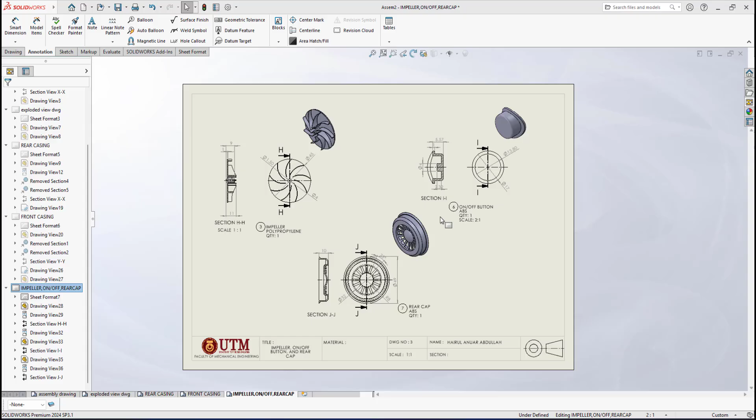This video will be part 16 of my SolidWorks mini vacuum cleaner project. For this video I will show you how I will do the detailed drawing of the other three parts, which is the dust container, valve, and also the crevice nozzle. So what I will do, I will duplicate this sheet here. I will make a copy and I will paste it.

So this I will rename it as, okay, this will be three parts. Like this drawing, I have the impeller, on-off button, and rear cap. For this drawing, I will put dust container, the valve, and also the nozzle into one drawing. Sometimes you can do that in a set of working drawings.

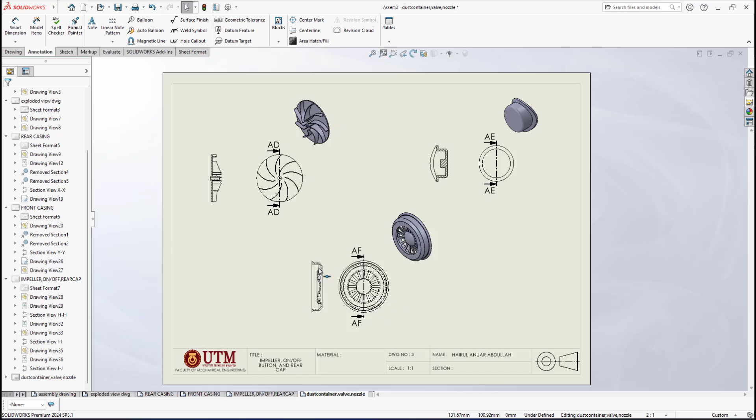Here in the view palette, I don't have anything. If you look at the view palette, I need to browse. Before that, I need to delete all this. In the view palette, I will browse for the dust container. This will be all the views from the dust container.

As you can see, I will not go for the front, the first view, since I will make a full sectioning for this dust container. I think the appropriate view would be this, the back view here. I click it, I bring it here, and I don't need the left view here because I will make a full section, and what I need is this isometric view. I will go for this orientation, and I don't need the other view.

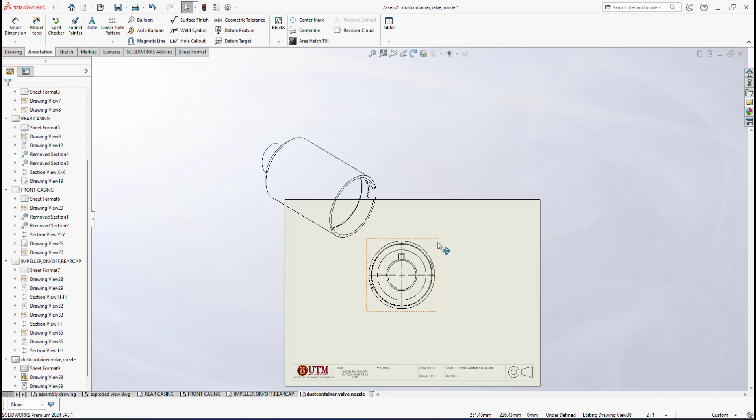The first thing is that this is 2:1, so I will go for full scale. For the isometric, I will go for half scale, and shaded mode. I consider this like a side view, so it means the front view. On the left view will be the full section view.

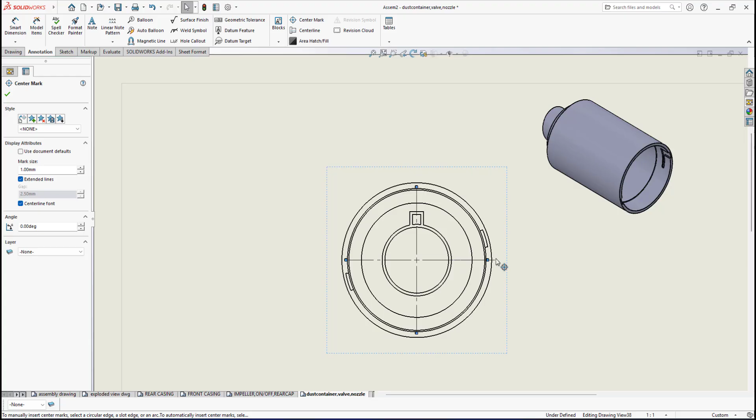This one, make sure tangent edge is removed, and about the center marks, I will go for 1, and I need to make this show hidden lines. I will do a full section vertical at this point. I click OK, then I will go for this direction.

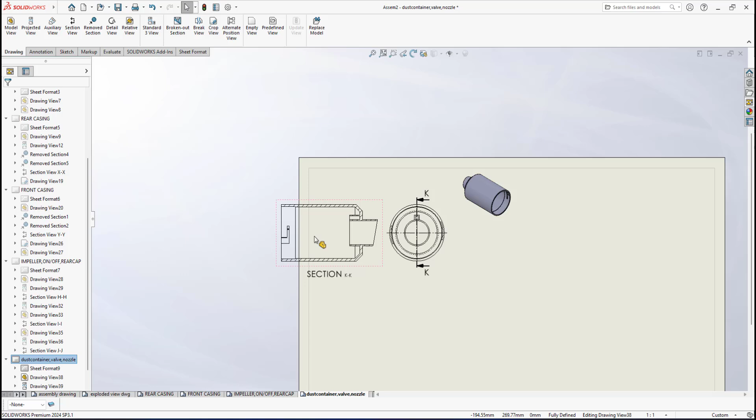About the name, since in the previous drawing I have H, I, J, this one will be K. Section K-K, and make sure that it flips direction like this. And this one I bring it to this position.

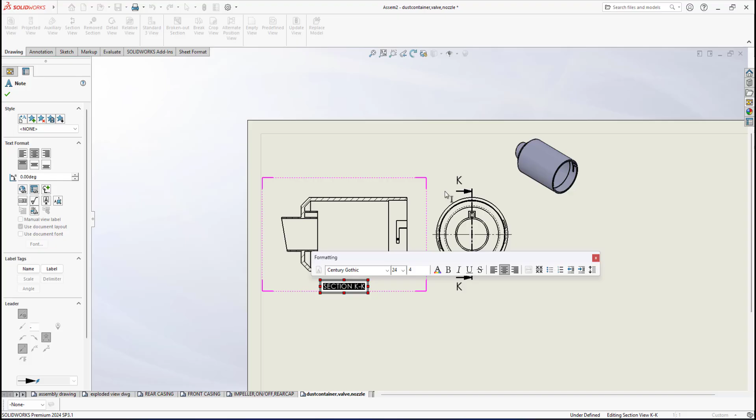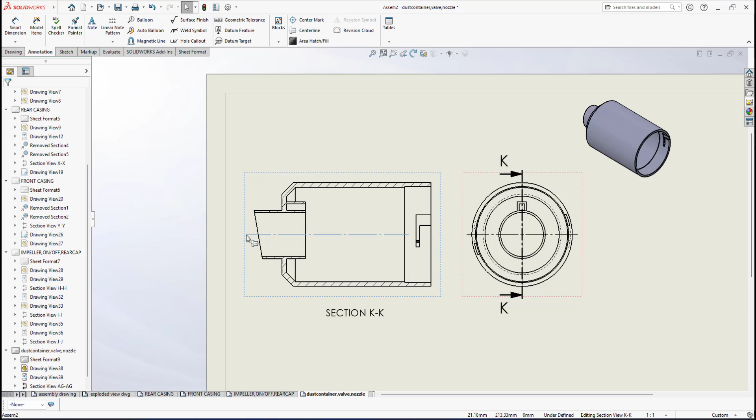This one also has to be tangent removed. Already done, and I need to show the center line. And about the section line.

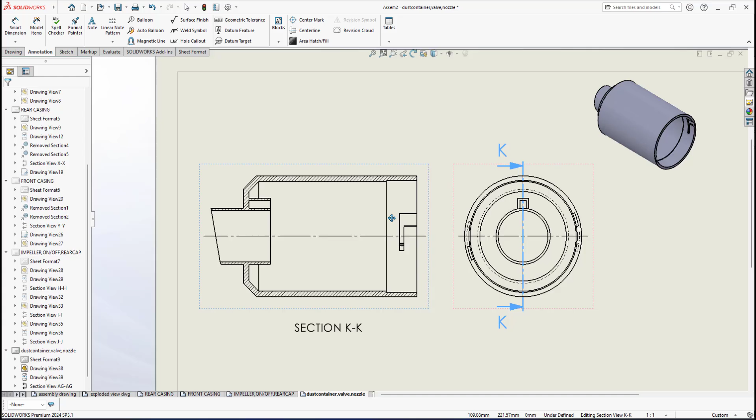For this component, it is a plastic component. As I mentioned before, we don't need to really make a detailed and complete dimension, as long as the dimensions that we show are important, necessary for the assembly and fitting, and only basic dimensions that we think are necessary for this detail drawing.

The first thing is the major diameter of this dust container. So I will dimension here. We have diameter 54. This will be important since it is the main diameter. Another thing is that for the assembly, we have this internal diameter here. The HEPA filter will be mounted until this level. The HEPA filter has this diameter, so this diameter needs to be shown.

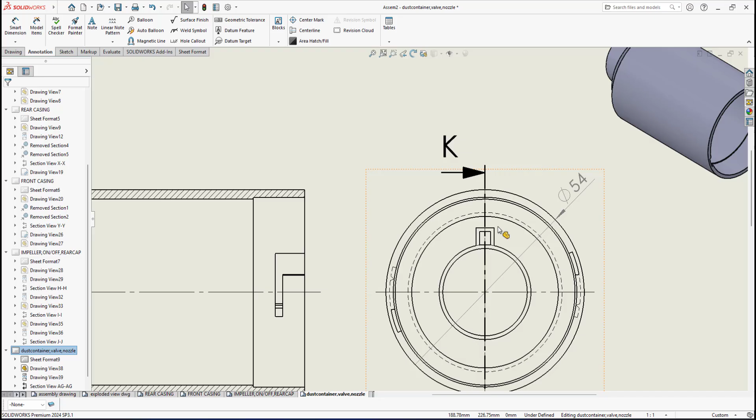For this diameter, if I put it here, it's kind of not showing, because since we have a section view, it's better to put the inside diameter at this section view. So I will put diameter 50. That is an important dimension to show the fitting of the HEPA filter, and we need to show how deep the HEPA filter will be mounted inside this dust container.

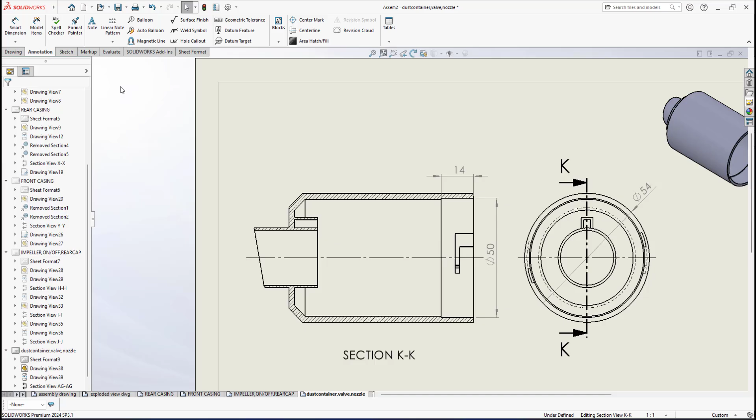So it will stop at this stopper. We have a cutout here, so you need to show the length of the depth. So I will put it here. And also the total length is important. Let me save my file again.

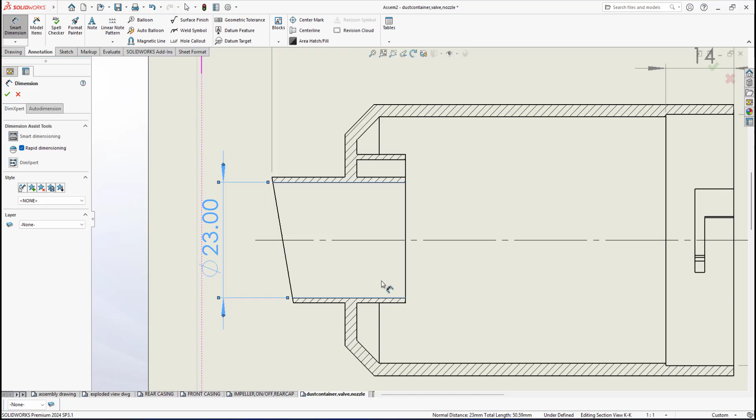Since we need to fit the nozzle of this dust container with what we call the crevice nozzle, the long nozzle will be fitted inside this opening of the dust container. We have the opening valve here, so we need to show the inside diameter. This is important to be shown. So I will give here diameter 23. Oh, decimal point. This one I can right click.

Alright, another thing is, I already gave the total length and the depth of the cutout, and this nozzle diameter. I need to give the dimension from here to this point; it needs to be shown. Right, so I will go for the dimension from this line to this point. Make sure it's in line with this 14. Okay, 27.5.

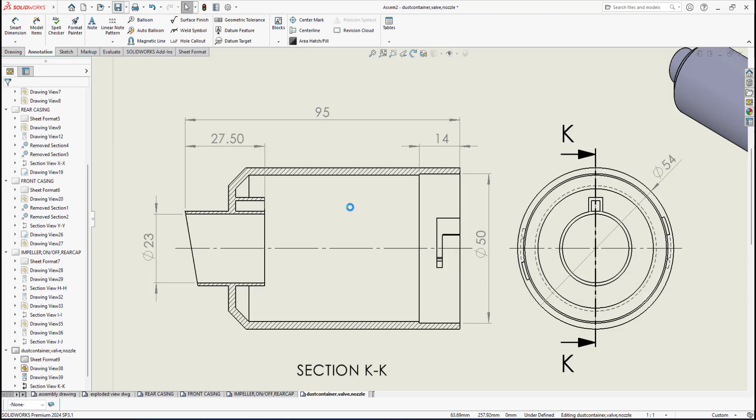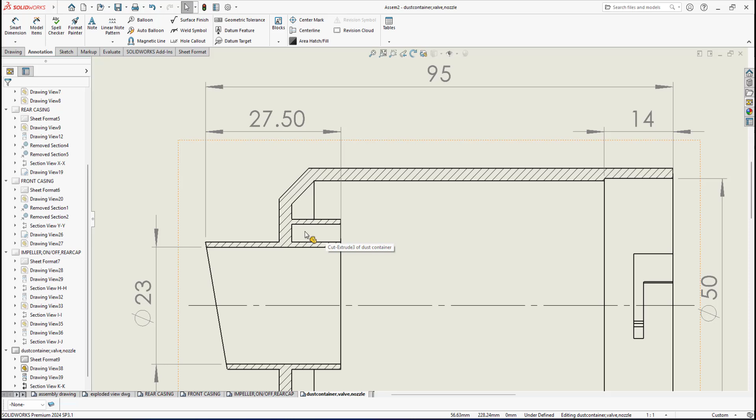Right, the next thing is, we have the valve here. The crevice nozzle valve will be fitted into this. We have a cutout, what we call a key. What I mean is a slot for the key of the crevice nozzle. Sorry, this is a key. What I mean, this cutout is a slot where we will fit the valve. The dust container valve has a rectangular key, so this will be the rectangular cutout. So I need to show this dimension.

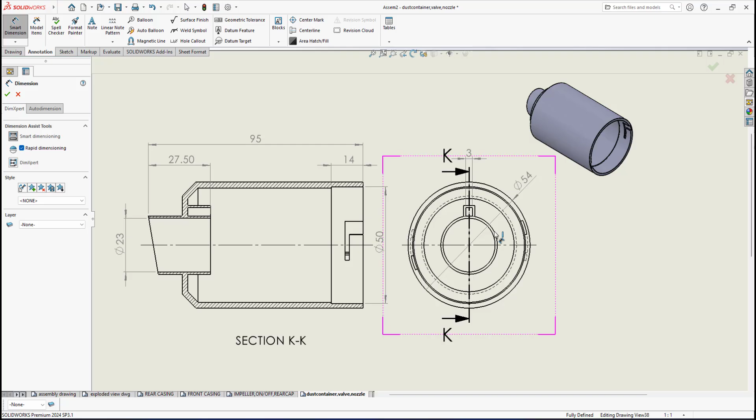Right, better to show the dimension here, because this view clearly shows the profile of this rectangular slot. So I need to give, okay, let me put it here. So this would be dimension 3, and I will give the length of this cutout. I will make it from here to this center point. Make sure it snaps at the center.

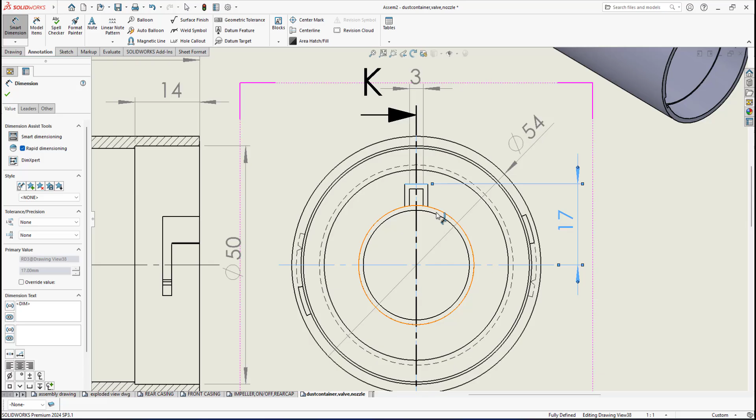I have here this one, so this will be the height, right? So I have given the width of this carrot as 3, and I already gave 17 from the center point, so we will know what the height of this carrot is. And I have to give this diameter as well, and the inner diameter is already given, 23. Alright, I think this is enough.

Alright, another thing, maybe I can give the thickness of the shell of this. Okay, there's another dimension that needs to be shown. Make sure it's in line. And alright, maybe I can give the angle of this cutout of the nozzle.

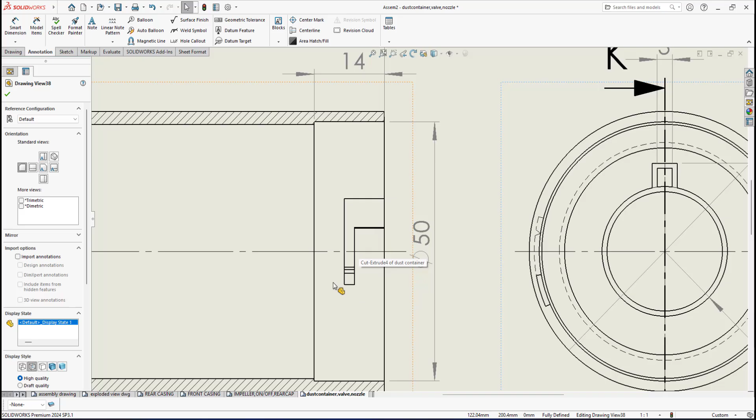Okay, the next important feature that we need to show here is what we call the L key slot. If you look at the rear casing detail drawing, I made a crop view to show that at the back we have the L key. Since this is a front view of the rear casing, the key will be at the back, so here is a back view. Looking at the back, I made a crop view to show the features of the L key, and this L key will be fitted into this dust container.

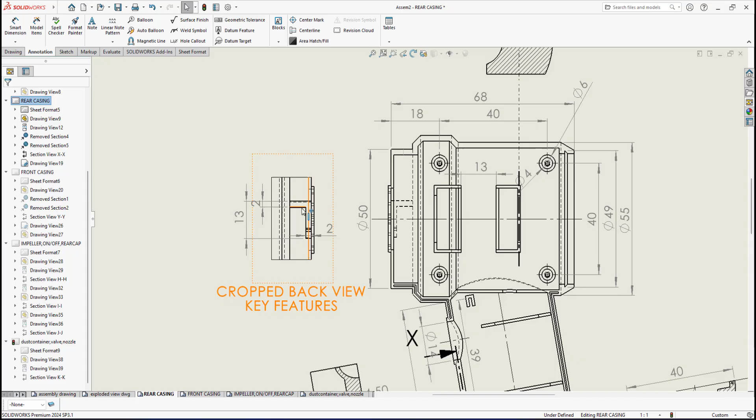This dust container will be fitted at the end of the rear casing, so it will be the L slot. Since the rear casing has the L key, the orientation of the L is inverted because we are looking at the back. Actually the L shape is in this orientation. Similar to this one, I need to show the dimension of this L slot. I will do a dimension from here to here, and it's stated that it is 16.

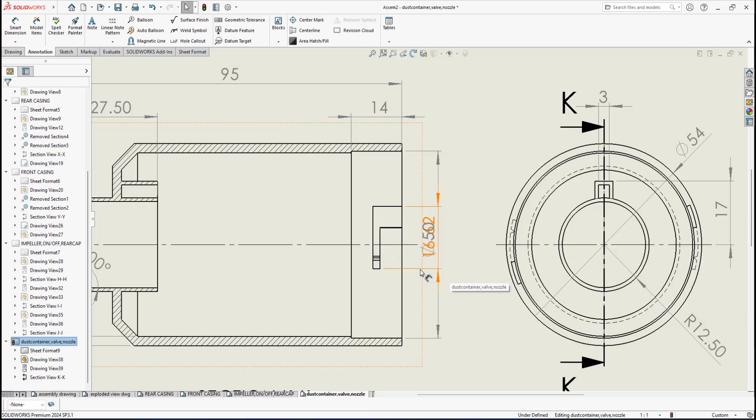Actually it is much longer compared with the L key of the rear casing, because when we fit the end of the nozzle of the rear casing and front casing, we turn it to make a snap fit, so this one has to be longer. The length of the L key is 13, but the L slot is longer. This one I need to drag; diameter 50 has to be shifted to this position, so I have 16.62.

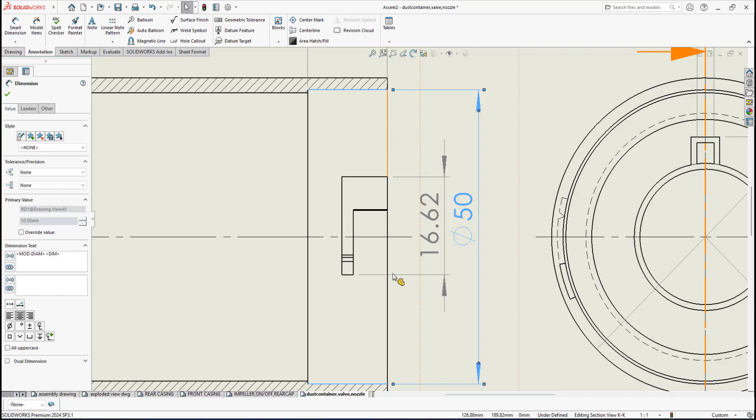Actually the true length is not 16.62, because I made this L slot by using the wrap command along the circumference of the cylindrical shape, so the actual dimension is 16. So I will select this dimension, and in the dimension text I replace it by 16, so that will be the true length. And also I will give the thickness here, and sometimes I can put it inside for clarity, so the thickness will be 8.

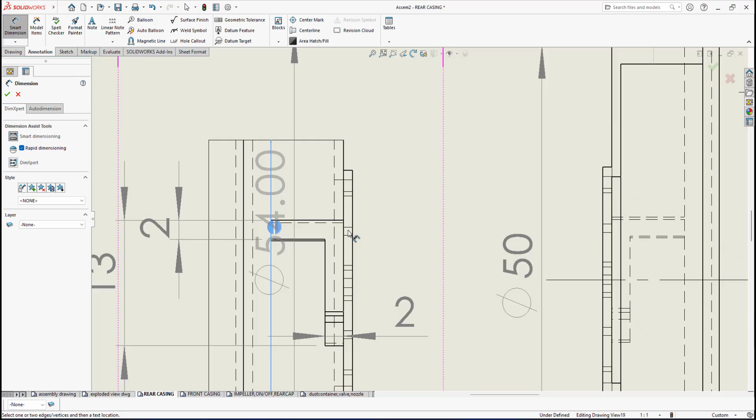Okay, if you look at the rear casing, the key of the rear casing, it's not showing here. Actually I need to add the dimension here. I didn't put any dimension, so it means I forgot the dimension for this in the rear casing detail drawing. I need to put it here to show the thickness of the L slot. Okay, I save my file again.

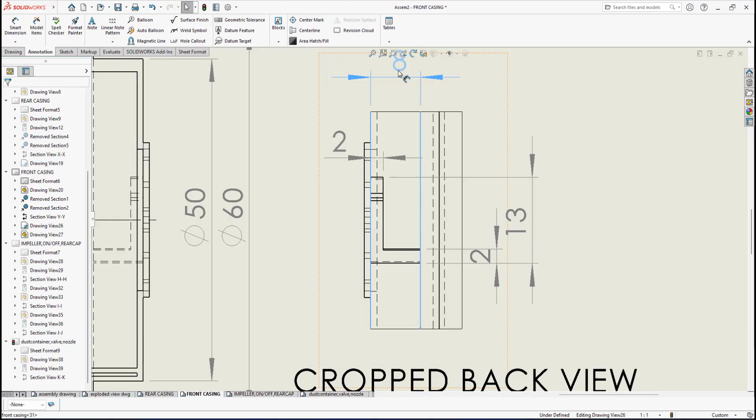Same goes for the front casing. I forgot to add the distance here. I need to show from here to here is 8. Actually, you put your dimension not too close to the border of this view. It must be at least 2 letter heights, but not too far above, about 2 letter heights.

Okay, back to the dust container detail drawing. So I've already put it here, and I've already given 16. Another thing is about the distance. Actually, this is not the true value. Just need to mention again from here to here. Since I have 16 here, and I put it into this location, it's 5.72, but the true value is not actually 5.72. And this 50 needs to be shifted here.

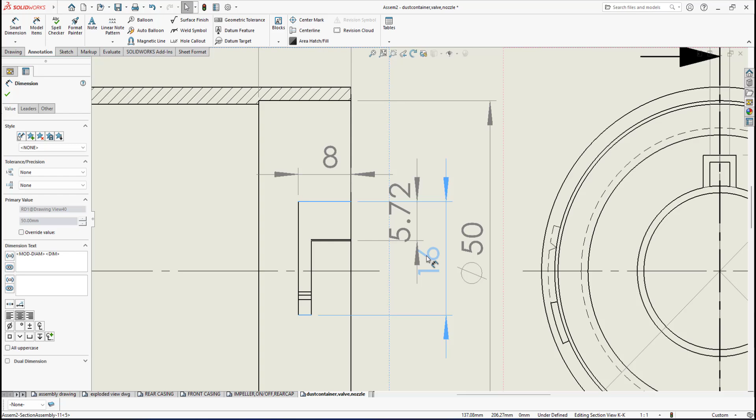Okay, the rule of dimensioning is that the extension line will not cut the dimension line. So this is a dimension line. In this case, I have the extension line, and this is 5.72. If I'm not mistaken, the 5.72 is not cutting the dimension line of 16. This is okay. As you can see, this value is 5.72. Actually, this is not the true value. I need to check it. This one is stated 16. Actually, it's not the true value. Let me check it. I will select this one.

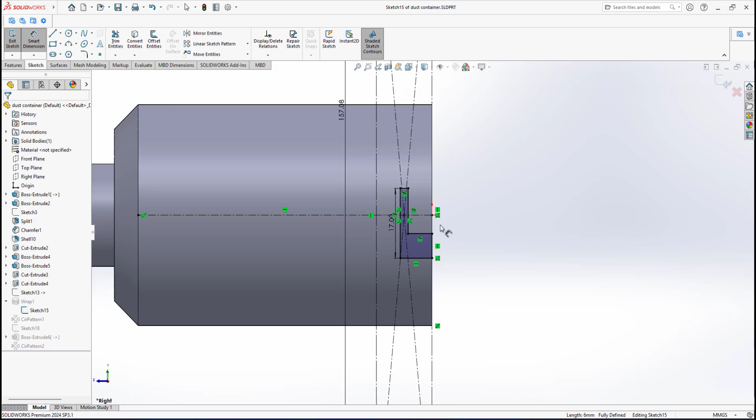I open the part in isolation. So this is the part modeling. Since I made this slot feature of this dust container by using the wrap command, as you can see in the feature manager here, under wrap we have sketch 15. The dimension here is 17, and for this distance, I can check by using smart dimension. So it will be 6 and 17, and the thickness here is 2. 6, 17 and 2. So I exit the sketch, and let me go back to the drawing.

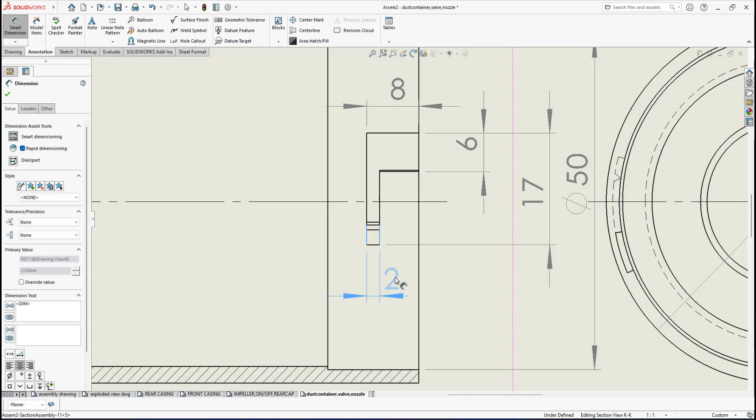6, 17 and 2. So it means that this is 17, not 16. I will change this one to 17, and the distance here I will put as 6. And another dimension is the thickness of this one. I can put it here. Okay, let me save my file again.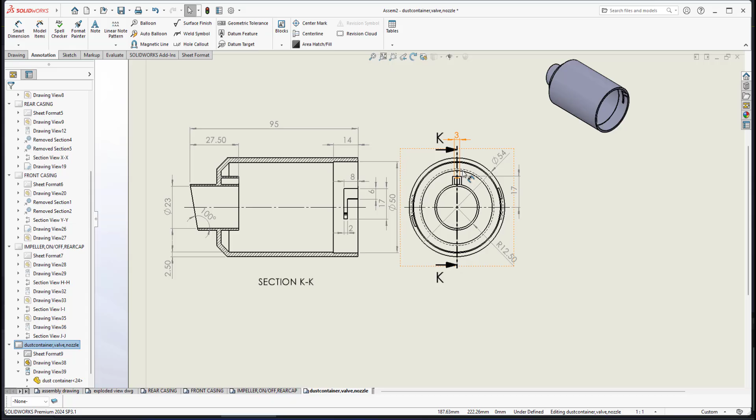Right, basically I have shown the important dimensions for this detail drawing of the dust container. Let me check again. I think this is good enough. The chamfer distance is not significant to be shown, because like I mentioned, the dimensioning is to show the features for assembly and fitting, because the way they manufacture this dust container is not by sending it to machinists to do metal works, drilling, lasering or milling.

This is a plastic part. The way they do it, it is sent to CAM, and CAM is sent to the CNC machine. The CNC machine will make a metal mold for this dust container, and that metal mold will be put into injection molding, and the injection molding makes a mass production of this dust container. So that's how they do it. So we don't have to show really detailed dimensions. The dimensions we show are only for assembly and fitting, only necessary and important dimensions. Alright, I think this is good enough.

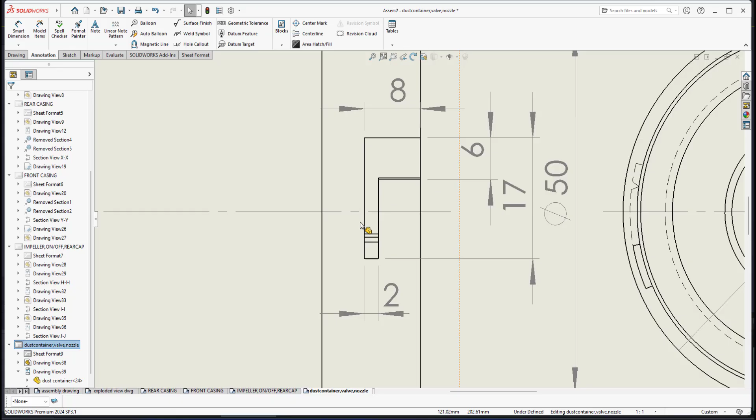What will be the size of the key is not that significant to be shown, because that is too detailed. As long as we show the size of the L slot, it is good enough. Alright, I save my file. So this will be the detail drawing of the dust container.

Okay, the only thing that I need to put is this one, the footnote. Okay, the footnotes, I will copy this one, and I will paste it here. Since I put 3 components, another 2 components will be put into this drawing. So we have to do it like this.

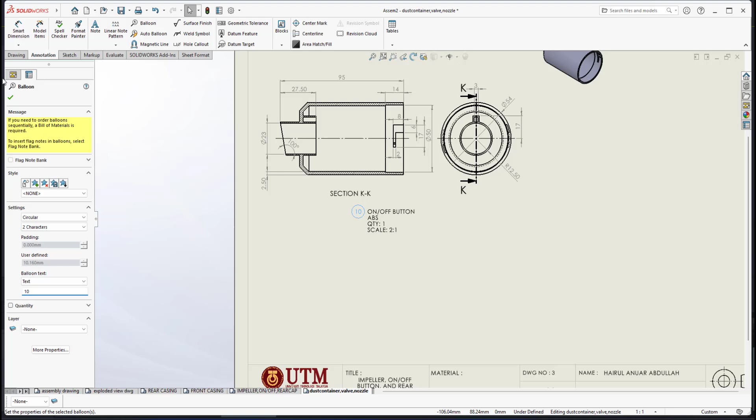Okay, the dust container will be part number 10, right? Dust container will be part number 10. Then I select this balloon, so I change this one to 10, and the name is dust container. The material of the dust container is polycarbonate, right? Polycarbonate.

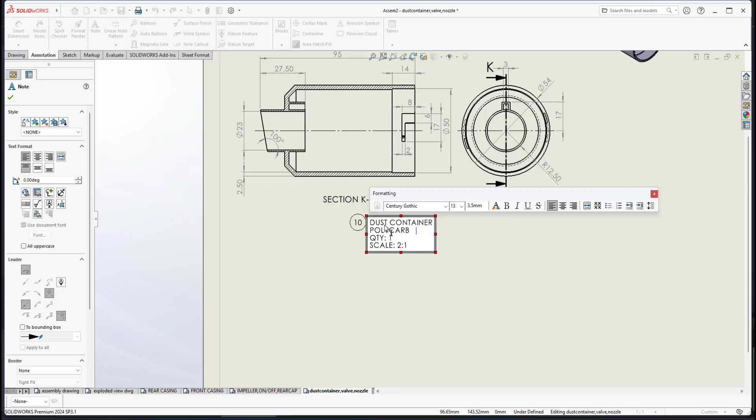Make sure it's uppercase. If I'm not mistaken, we don't have the option to make this uppercase, so I need to type it in capital letters, polycarbonate, and quantity is 1. Okay, the scale is not 2:1 since the scale I use is 1:1. It's already stated here, and also you can check here. The scale that I use for this is actually 1:1. If I go for 1:1, this will be full scale.

Alright, so since this is full scale, this one needs to be deleted. So I have part number, part name, material, and quantity. It means the scale 1:1 will refer to the scale of this main drawing. Okay, now I have completed the dust container.

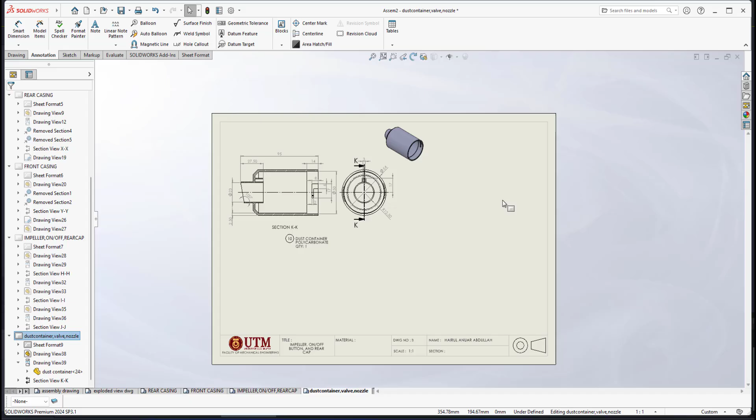Now I will insert the other part, which is the dust container valve. In the view palette, I will browse for the dust container valve, then click open. Then in the view palette, for the container valve, I will go for the back view. Do not confuse about the orientation. This is the way we do part modeling. So the back view, I can call this a side view.

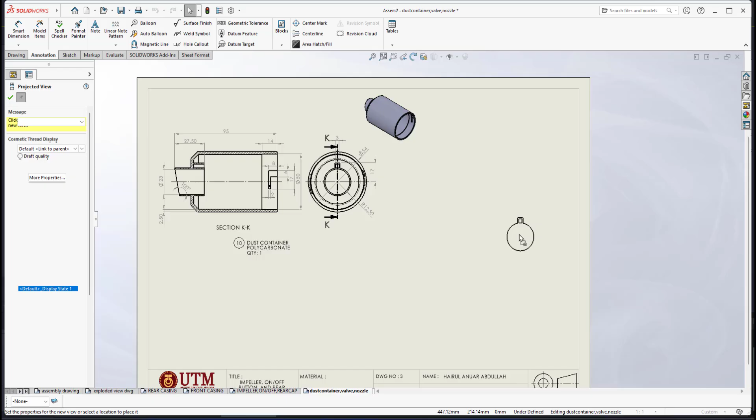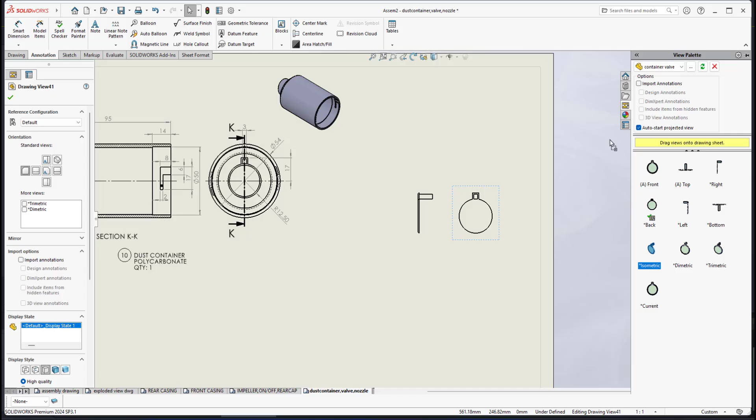Since this is a simple component, no need to be shown in full sectioning. Only 2 views is good enough to represent this dust container valve. Also, maybe I can show the isometric view. This is 1:1 scale. Do I need to make it bigger? Yes, I can. Here I select the main view and I go for 2:1. This one also I go for 2:1.

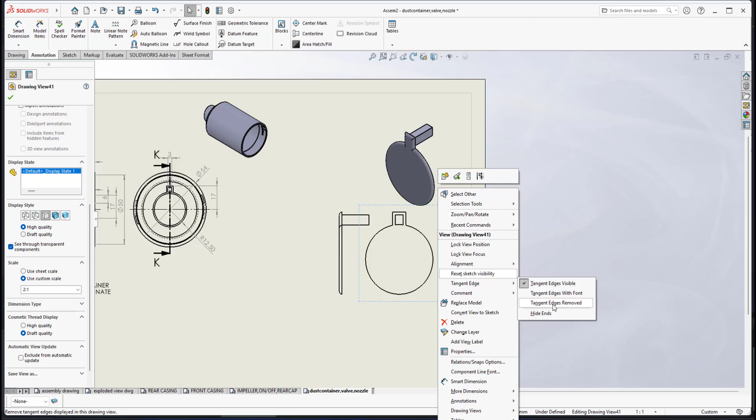Okay, since this is orthographic, better I do sectioning, because we have kind of a rectangular slot. And this one shows hidden lines, since the hidden line showing here is because we have filleting. Okay, never mind, let it be like this. And this is looking at this direction, so we have a key, and I need to put a center mark here.

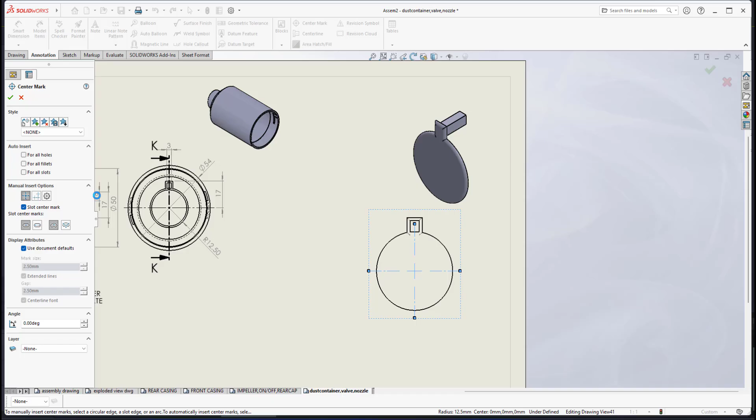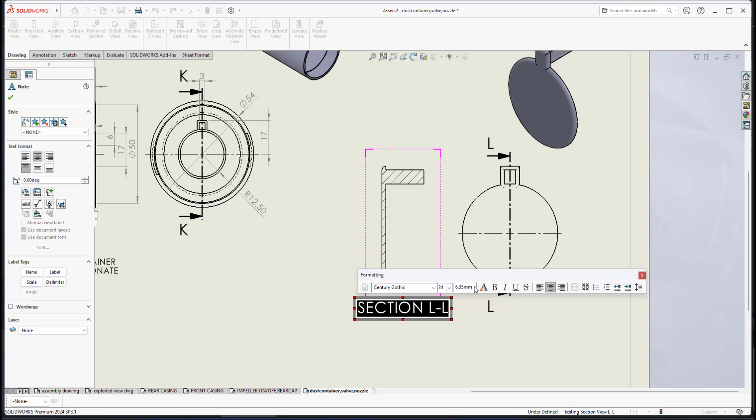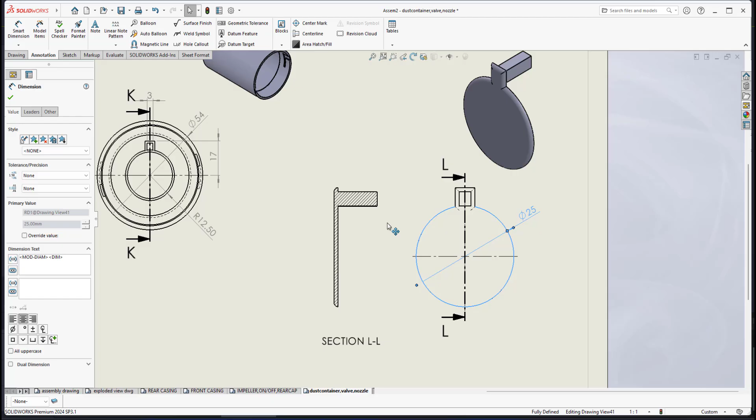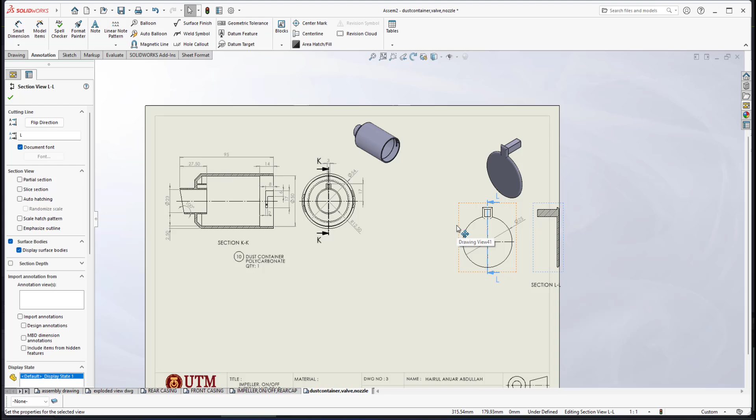As you can see at this view, the dust container valve will be fitted in this orientation. Better I go for this. I select this one, I'm not doing dimension, press escape, I select this cutting line and go for flip direction. So the section view is like this, because it better helps people understand that this valve will be fitted into this rectangular slot. Okay, and put it here.

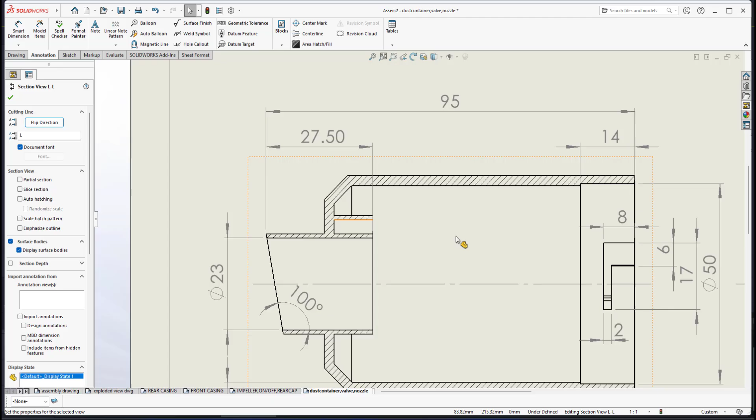I already gave the diameter 25, and since we have a depth here of the rectangular slot, I forgot to add an important dimension: the depth of this rectangular slot. So I put it here. Make sure it's in line. I shift it. Okay, never mind. This one no decimal point. This one needs to be in line with the 14 dimension.

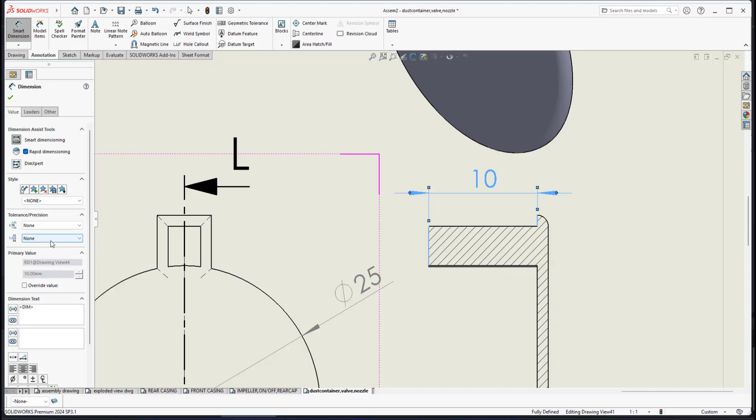Okay, this is 10, and the dimension for this one from here to this line is 10 as well. So this dimension is for assembly and fitting. So this important dimension needs to be shown, and the diameter is already given. What will be the total? Okay, another important dimension is the thickness of this key, 3.5.

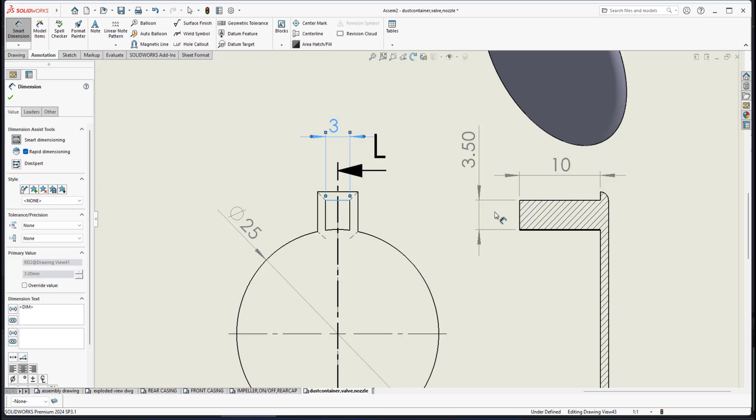And okay, I already gave the thickness, and about this thickness we also need to be careful about the dimension, and also this 3 like this. At this position we have the thickness is 3, and the height here is 3.5. Okay, 3.5.

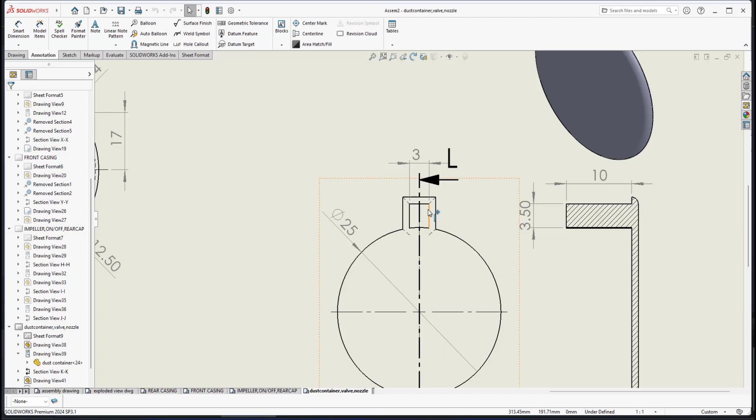Okay, hold on. Okay, now SolidWorks is updating, saving and updating all the settings that I've done. And okay, another important dimension, since this is a dimension of the key, and this offsets the size of the key, but the main thing about the key is the important 3 and 3.5, so it will be fitted to this, what we call the rectangular slot. So I need to give from here to here is 3.5. So this one needs to be shown.

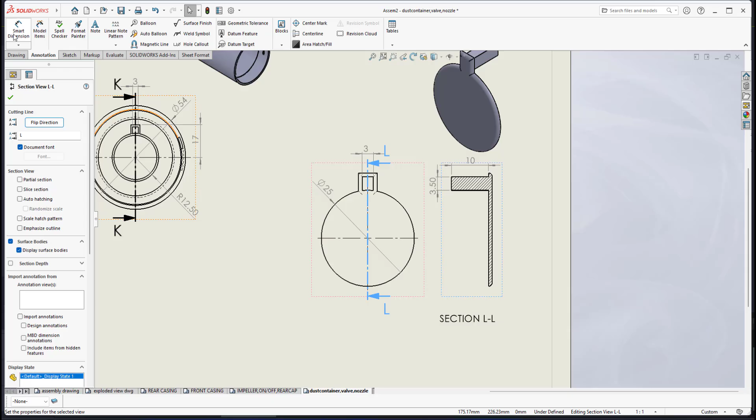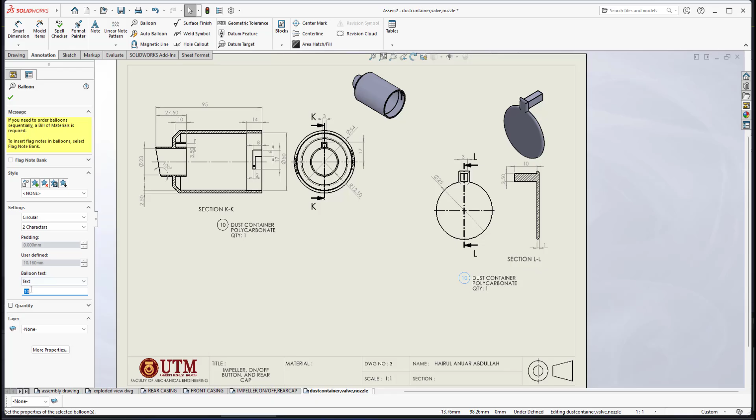Okay, and maybe I can go for the thickness, right? Okay, I think that's all for the dust container valve. And okay, I need to copy this thing. The dust container valve, the part number is dust container valve part number 11. And dust container valve, and the material is silicone rubber, right? Silicone rubber. Hold on.

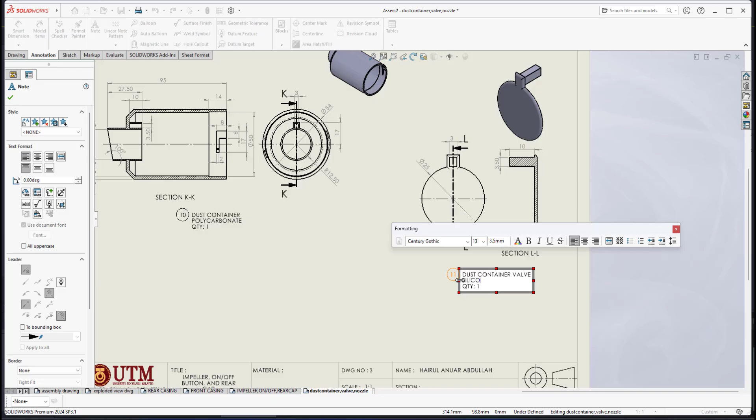This one is maybe something that I missed. Maybe we can change it here to make it uppercase. It means that I need to type it again. Silicone rubber. Silicone rubber. Quantity is 1. And now I have completed the detail drawing of the dust container valve.

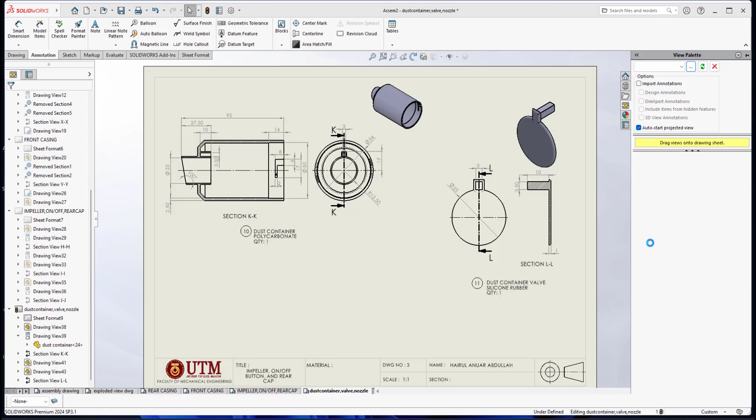And now I will show you how I will do the detail drawing of the last part, which is the crevice nozzle. And here under the view palette, I will browse for crevice nozzle. Okay, if you look at the menu here, we have all the views. What will be the appropriate view to be dragged into this drawing? I will go for top view. I select the top view because it is much better. Later I will do a full sectioning on the front view. Since the crevice nozzle is a long nozzle, better to go for top view.

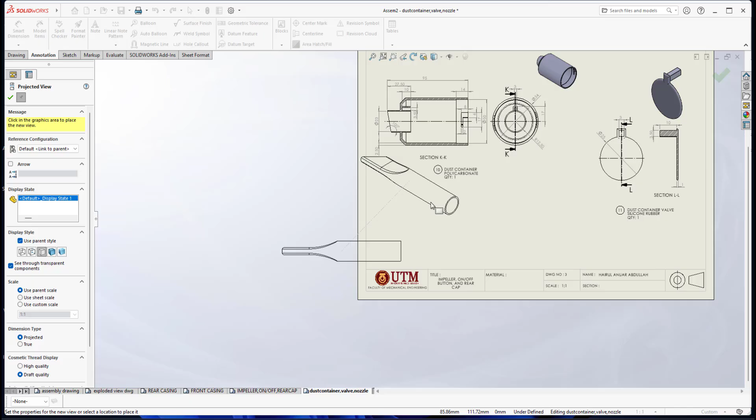Sometimes when you bring it here, it is kind of attracted or attached to this view. I need to make it free. You just simply bring it somewhere here, so it's not attached to any viewport that you have already dragged into this drawing. Alright, I will not go for any side view or top view, and also the isometric view orientation is not the right one. I just press escape. Okay, this top view of the crevice nozzle, let me put it somewhere at this position. Another thing is this is 1:1 scale, so this is a full scale. Full scale is good enough.

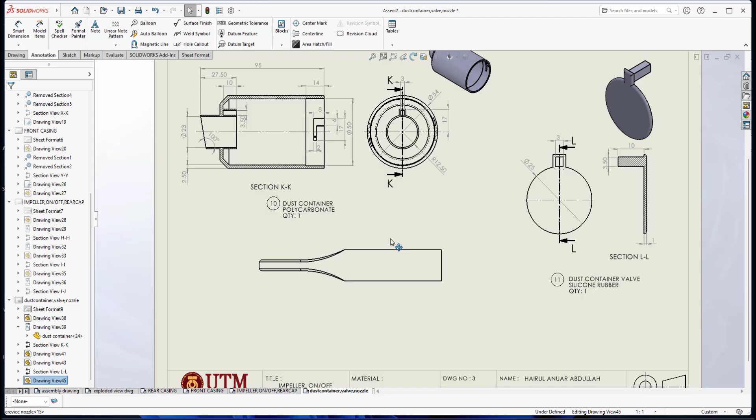Okay, before that, let me adjust the position of this so that I have enough space to do the detail drawing of this crevice nozzle. I need some space here. Right, this will be the top view, and I will remove, and this one must show the hidden line. And another thing about the isometric view, later I will drag this isometric view. Let me put it somewhere here, and this isometric view I make it half scale. Make sure tangent edge is removed, and this one I can make it shaded mode.

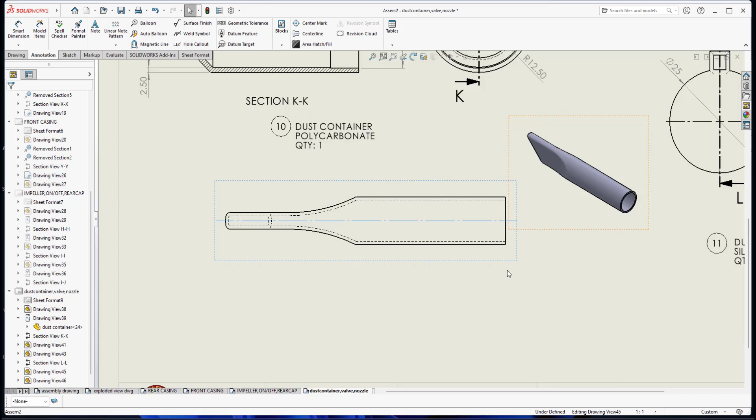Alright, since this is a top view, we must show the hidden line, and we need to show the center line. Since this is within the axis, the line must be shown. And I will do a full section, horizontal, and there, and I click OK. Then I put this as the section view. And since I've already used section LL, hold on, I select this cutting line here, so this one will be M.

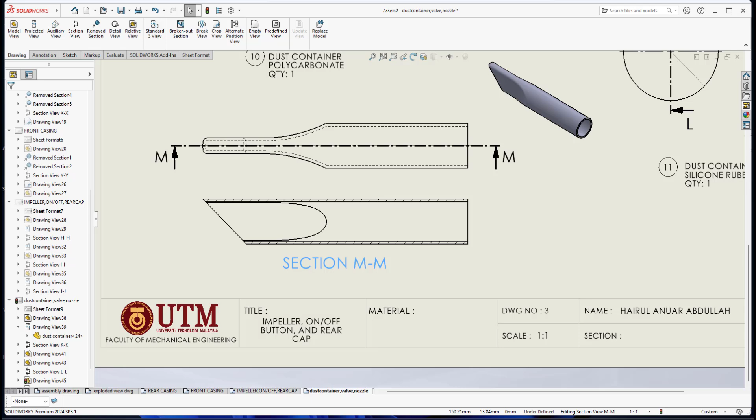And the height is 4. Alright, okay, now I put the dimension.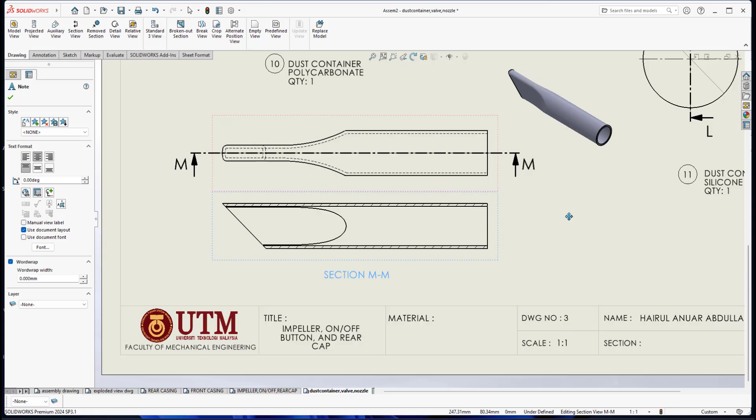Dimension notation, then I will do dimension, since dimensioning is about the important dimension only for fitting. For fitting, it means that this crevice nozzle will be fitted into this opening nozzle here of this dust container, and the diameter is 23. So that's the dimension here. From here to here is 23. And right, another thing is about this hatching line.

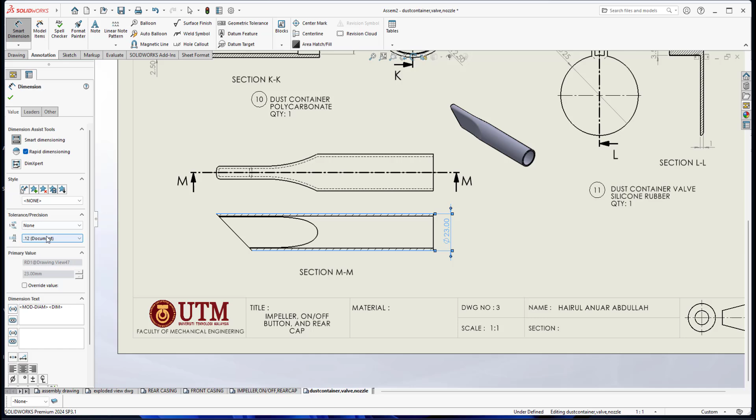And also need to put center line as well. Alright, I already gave the 23. Maybe I can go the inner diameter. The total length.

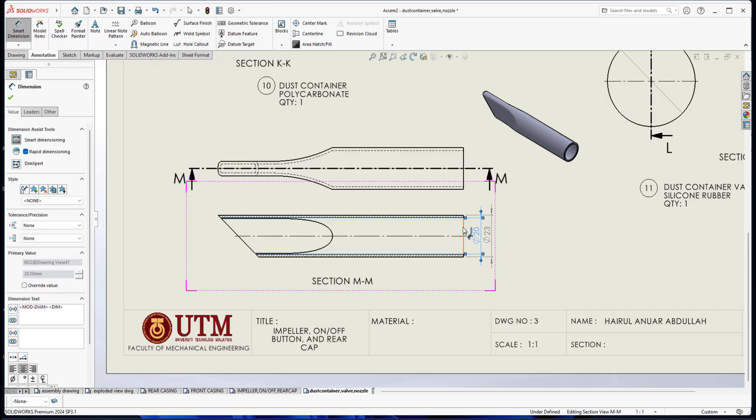If I go for the top view to put the total length, I cannot pin to here, so better to go for this view up until this point. So this would be the length.

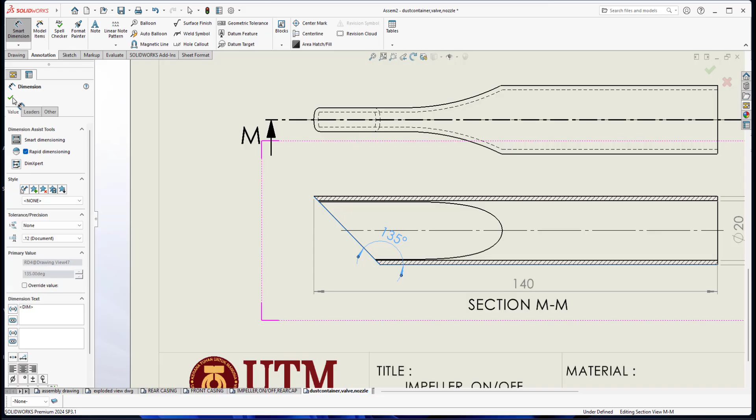Alright, about what will be this curve, the cutout, that is not significant. And what I need is the angle. Right, and okay, I've already given the total length, the tube size, and okay, maybe I can go what will be this length.

Another thing is what will be the thickness at the end of this nozzle here. So I can go for, I can put it like this, right?

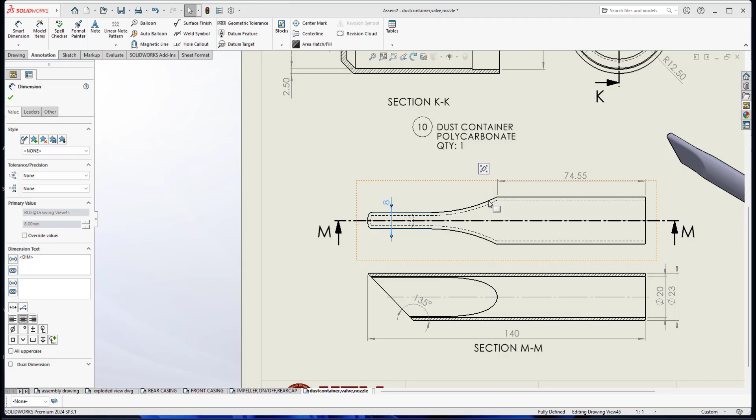Okay, I save my file again. Okay, let me make a final check. Yeah, I think that's all for the detailed drawing of this crevice nozzle. And as I mentioned again, only dimension, important dimension for assembly and fitting, and only necessary dimension like the overall size. Alright, I need to copy this.

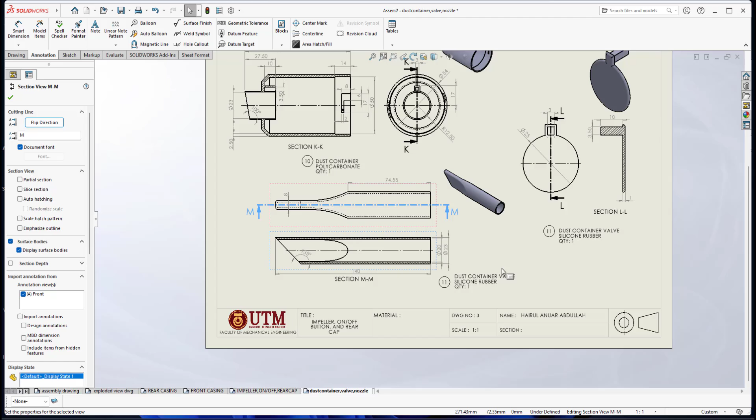And okay, I can put it here. Okay, the name is Crevice Nozzle. Okay, the name is Crevice Nozzle, and part number is part number 13, and material is polypropylene.

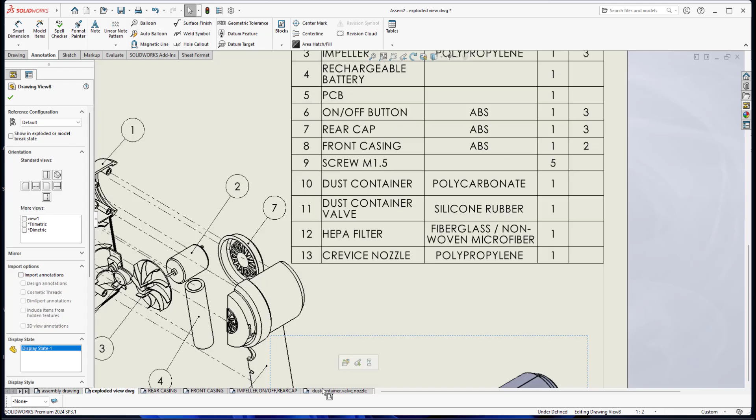Material is polypropylene, polypropylene. Let me check. Polypropylene. Right, and the part number is part number 13, right?

And the quantity is 1. And also this Crevice nozzle, I use 1/1 scale. Okay, I use 1/1 scale, and I will not show the scale at the bottom here. So since it will refer to the scale 1/1 at this title block, alright.

Alright, another thing is about the title here. So I will edit it. So the title will be dust container valve. Dust container. And the Crevice nozzle.

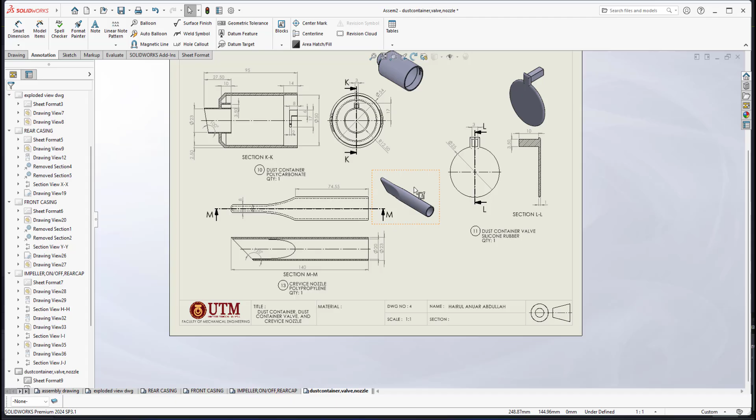Okay, I will not put materials since we have multiple components in the same drawing, and the drawing number would be drawing number 4, and the scale that I use is 1/1 scale. Right, so here in the BOM, the dust container will be drawing number 4. Same goes for dust container valve and the Crevice nozzle.

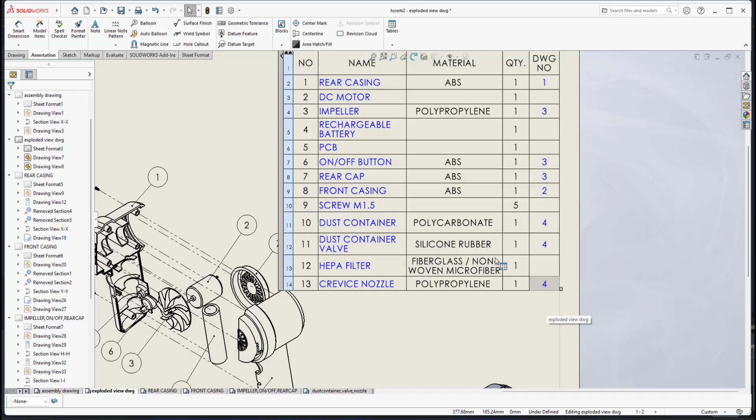Okay, let me save my file again.

Alright, I need to mention to you again about the HEPA filter, since I have already mentioned in my previous video that this HEPA filter will be a standard component. It means that this company who designed and manufactured this mini vacuum cleaner will not make this HEPA filter themselves, they simply order it from the vendor. Alright, so this will be a standard component. So if the HEPA filter is a standard component, we will not do the detailed drawing.

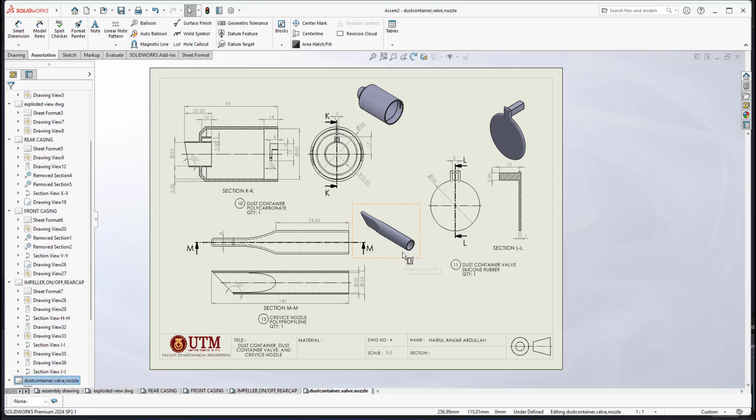Okay, Alhamdulillah, I have completed everything, starting from the beginning, the part modeling of my mini vacuum cleaner, and I have already shown you how I've done the full assembly as well in my earlier video. And also I have shown you how I have done the exploded view with the exploded lines, and also I have shown you the full set of the working drawings of these mini vacuum cleaners. From the assembly, we have exploded view and rear casing detail drawing, front casing detail drawing, the impeller on off button and the rear cap, and also the dust container, the valve, and also the crevice nozzle.

Okay, inshallah, in the next video I will do the final video of the set of my mini vacuum cleaner video tutorial project. It's about pack and go and how you will send your file to the e-learning.